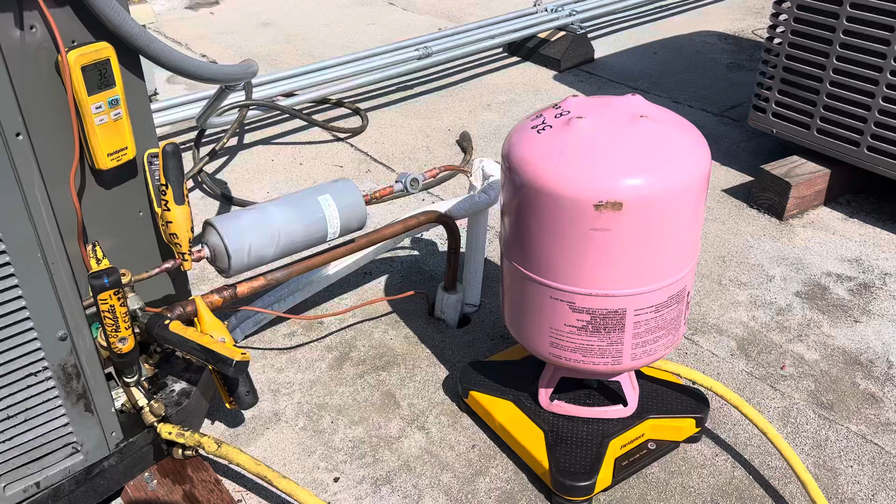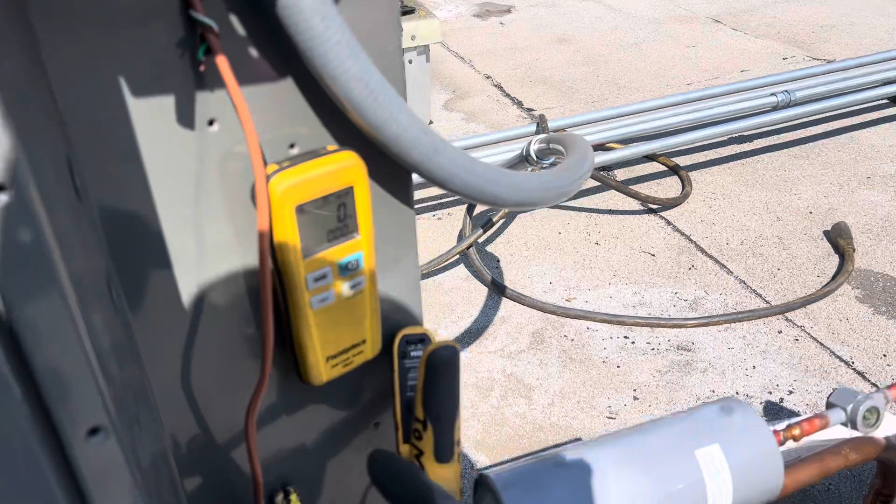All right, we're ready to change our superheat. And let's zero out this 32 12 ounces. And I already weighed the container of refrigerant without the hose attached to it. Was 32 pounds, 8 ounces. We're looking at it over here at our subcooling at 0.4. Come back, 0.4, 0.7. And we're 68 degrees outside right now.

So let's look at our chart here. Let me zoom in on it for you guys. So that's Apple. Give Apple a minute so it decides it wants to focus for us. There it goes.

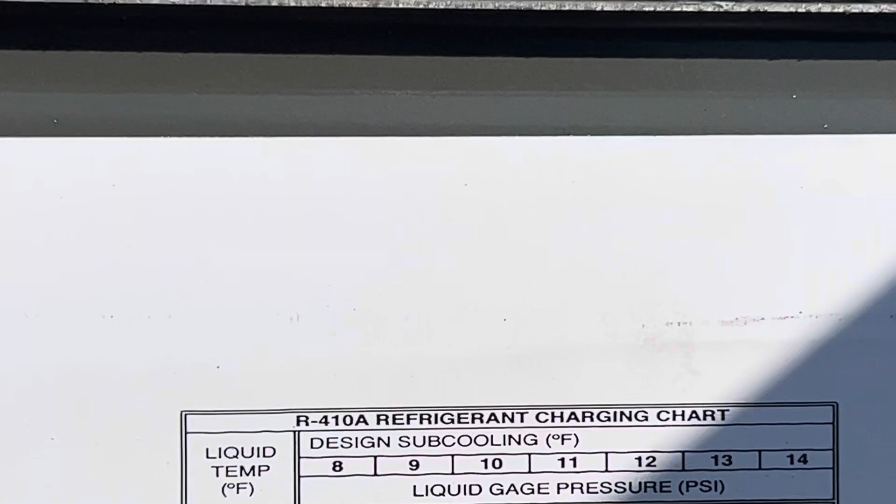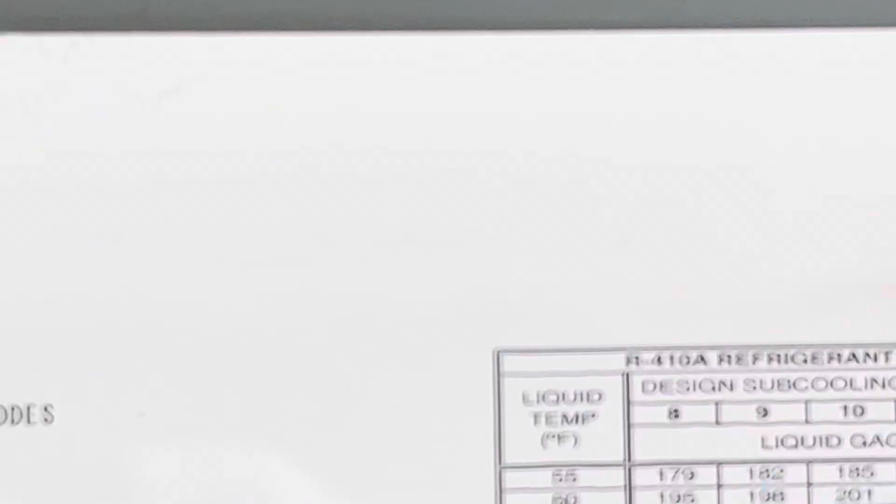So our 80 degree, and the temperature will change just a little bit, and they'll start to narrow down and come into each other a little bit, and you'll see this. The superheat, where are we going? Where's my finger at? There we go. You'll see that go up. It's been running for about 10 minutes now downstairs, 15 minutes. So I've given it more than enough time to stabilize.

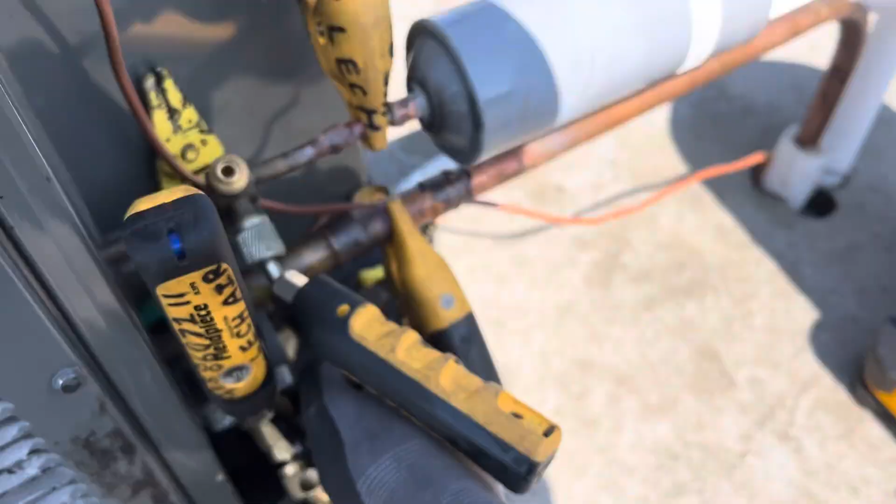So let's do a little doohickey here, and let's look at the weight. I just cracked it a little bit, just a little crack. There we go, and I'll let that go in. See how fast that was? And that was just a little crack. This is under 200 and some PSI right now. That vapor line's at 114 PSI, so we have a pressure difference. Let's come back over here and take a look at that. Hey, look at our subcooling, 1.1.

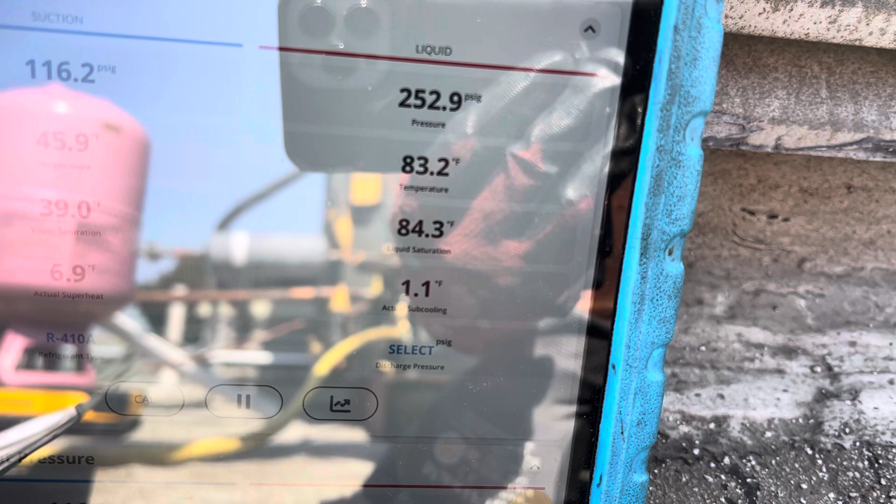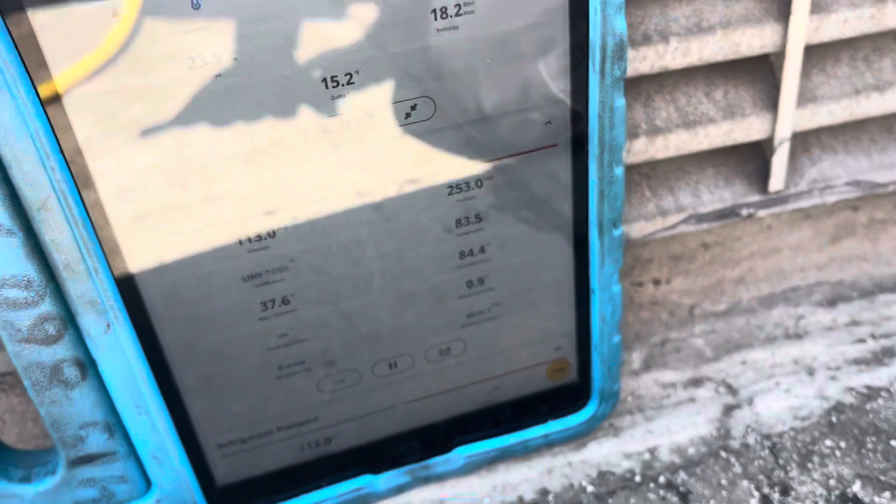And let's see if I can get that glare out of there. Can I get that? Oh yeah, I can. There we go. Is that my unit? No. That unit just shut down.

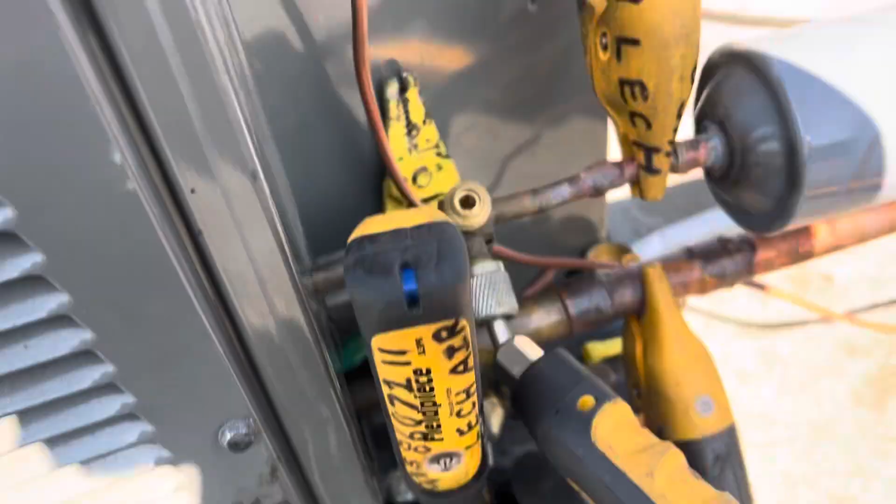So it takes a while. You need a few minutes between additions, but we need a lot to add. So I'm not gonna wait a long time between additions because we're nowhere even near close. So let's look up here. We're at 10.5 ounces. Let me crack it. See what I'm doing? I'm just barely moving it until I see some weight move on the scale.

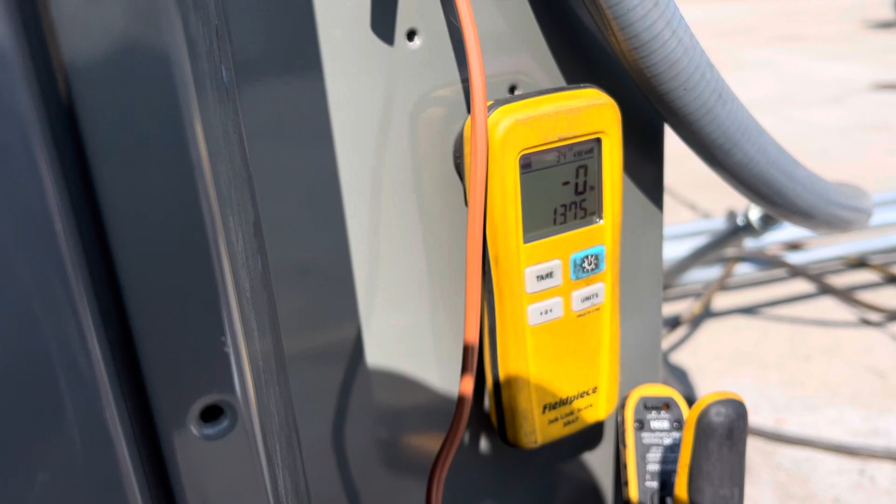I think I hear something. Do I hear something? No. There we go. I heard something. There we go. See it moving just a little bit? I want to slow it down. It's going in by the quarter ounces. Okay, I shut it off. So we now have 1 pound, 4 ounces in the system.

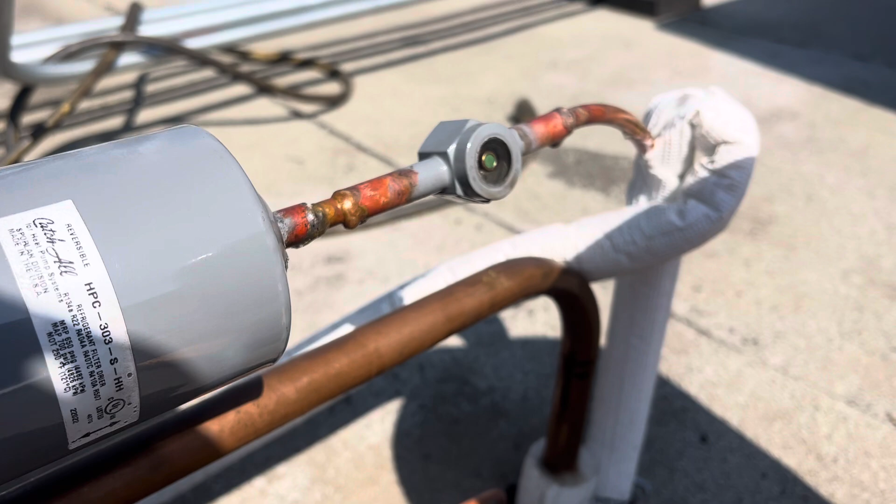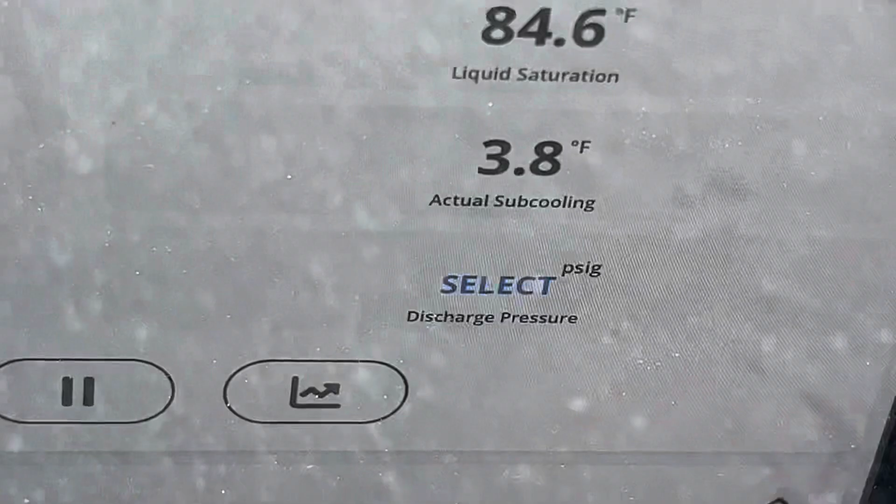Hey, look at that sight glass. Now don't go by sight glasses. Remember what I told you about going by sight glasses? That's getting to be a pretty damn clear sight glass. Oh wow, we got a clear sight glass. We must be good to go. Isn't that what the jerk off, top off can guys do in automotive? It's clear sight glass, good to go. Well, let's see what we have here. 3.8 subcooling. We're not full yet.

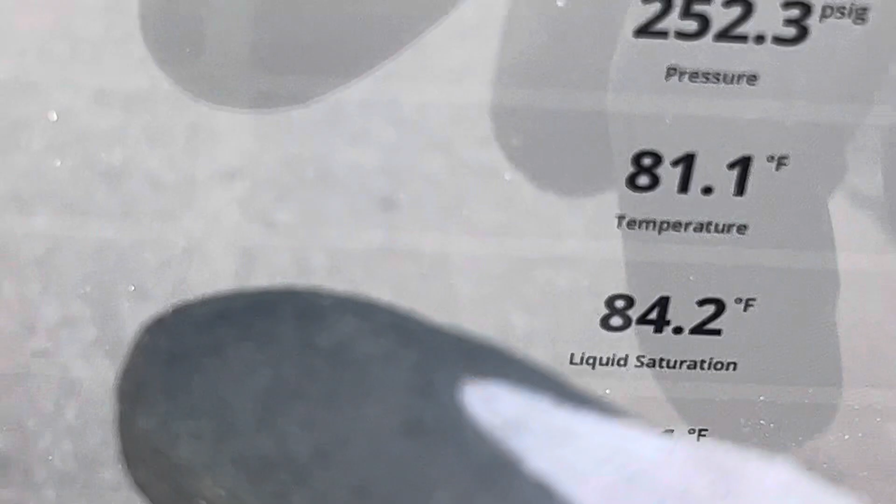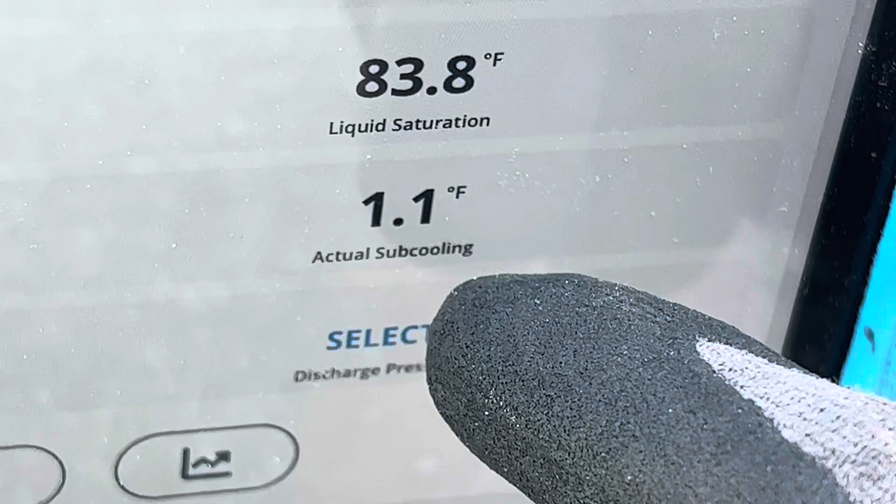What do we need? Our line temperature. Let's look back at our line temperature. Our line temperature is 81 degrees. So there's 80. We should be somewhere close to 267 PSI, and our Apple does not want to focus right now. 267 with the 8 degree subcool. We're at 250 PSI, and look, we're going back down to 1. See, the refrigerant that I just added is stabilizing out. It's distributing throughout the system.

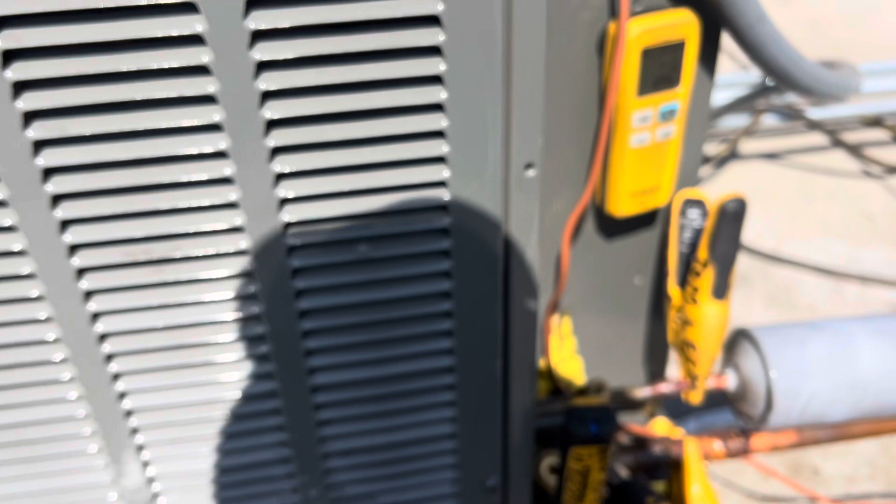I'm putting in a little bit more. You can see it going up there really slowly. It's like going in at a quarter ounce at a time, half ounce at a time. It's not gulping it. And we have a crystal clear sight glass. Okay, I'm gonna stop her right now. I know that's not even close to enough. But I'm gonna do that a little at a time and show you guys the little increments of movement and then see it stable out after a few minutes.

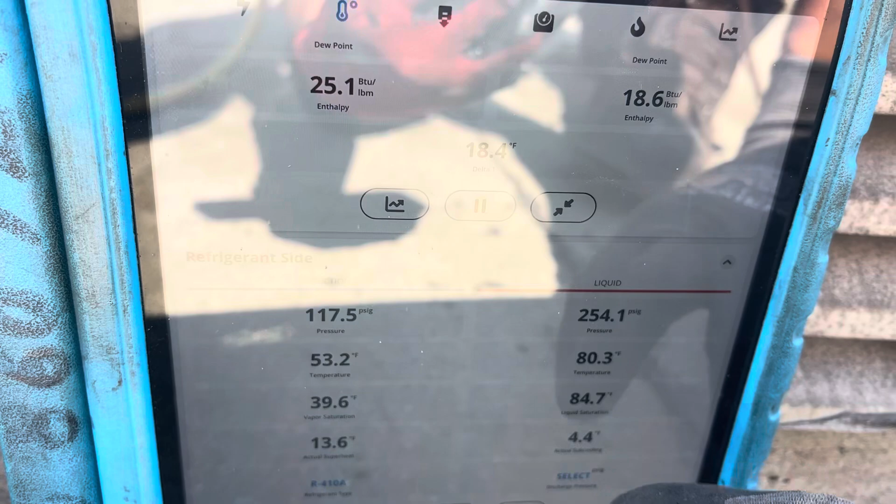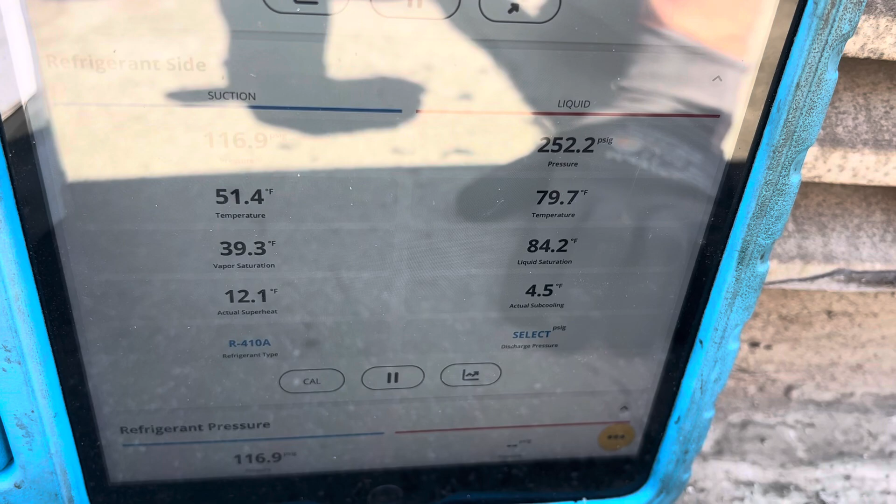Right now it says 4.5 subcooling. Give that a minute. Let it move around the system.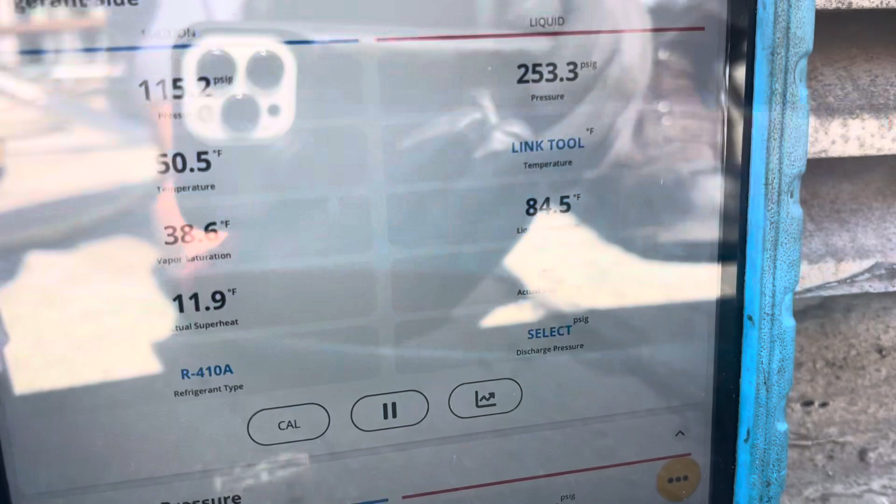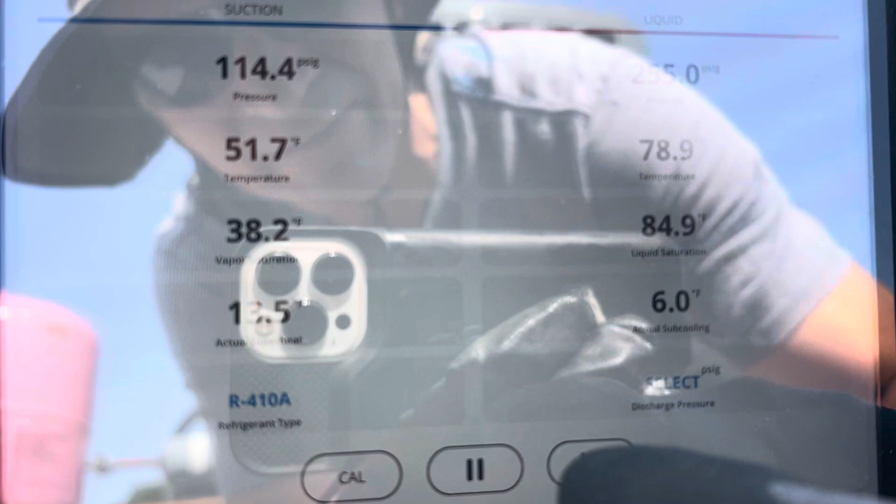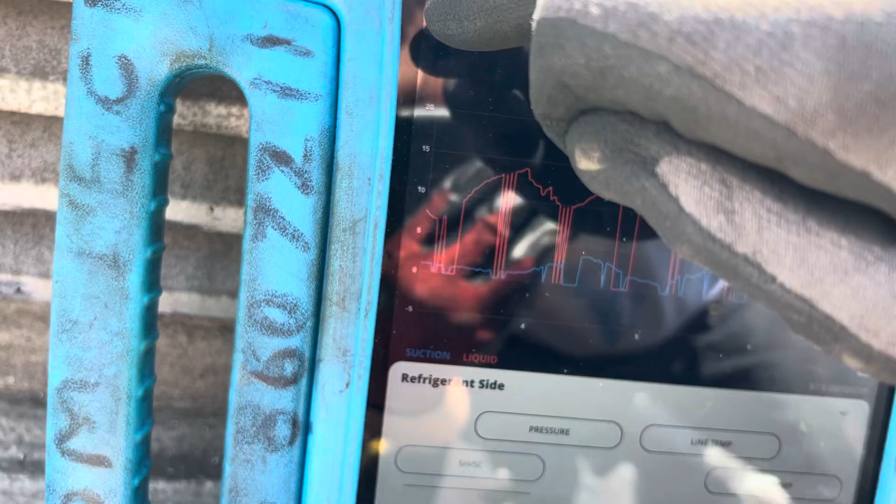And I have the subcooling graphing too at the same time, so we can take a look at the graph. I have that. God damn it, there it goes. Okay, there it is. You can see we're having some dropout of our signal right now. God, that's really unusual. I usually never have dropout, and I really have to take this glove off. Hold on a minute, take my glove off. Let's go back. There we go.

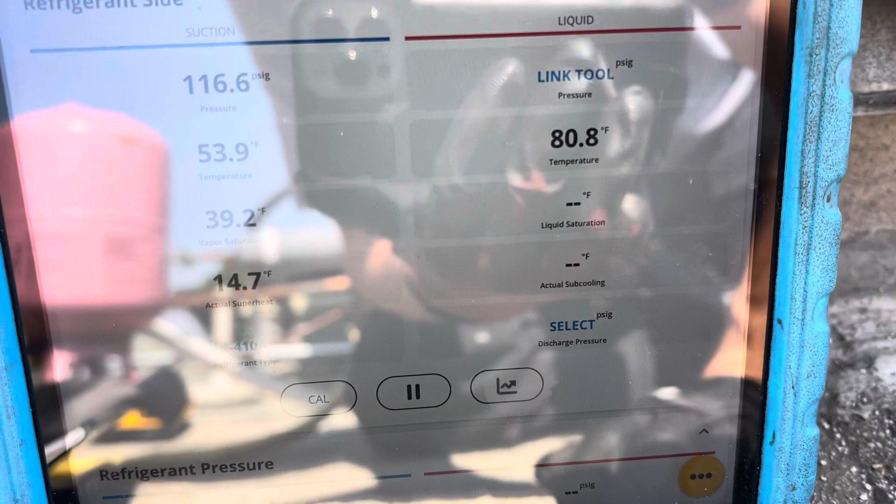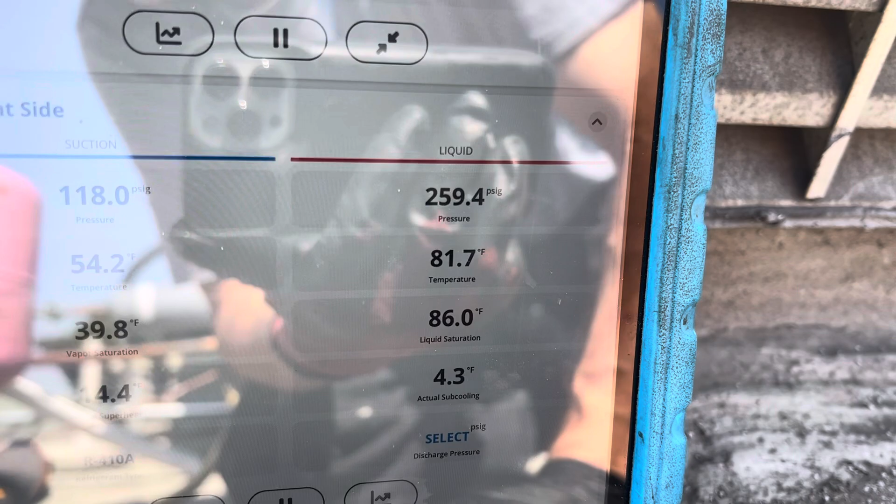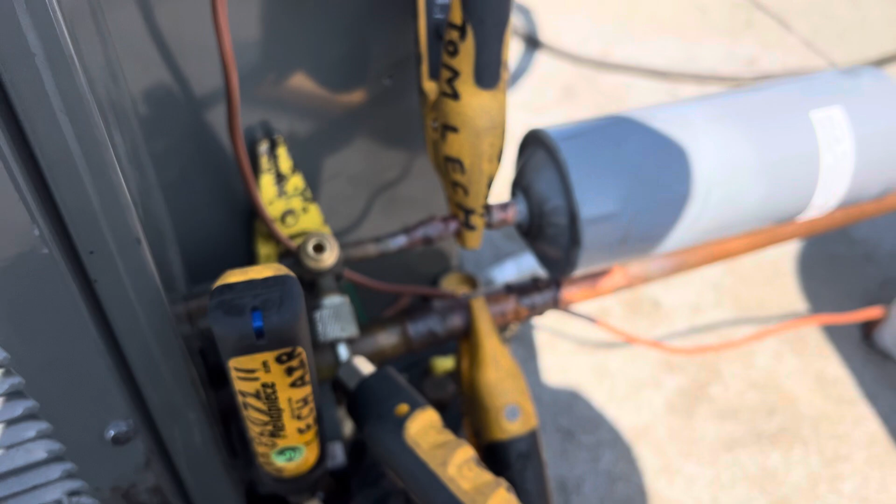So we're 4.3 subcooling, so look at it, we're at 259 PSI. At that 81, 259, we're getting closer. Now isn't this easy? Couldn't life be this easy in automotive? Let's do a little bit more. I'm gonna hit the ball valve really slowly. There we go. Nope, that's not it. Still not it. There we go, I hear something.

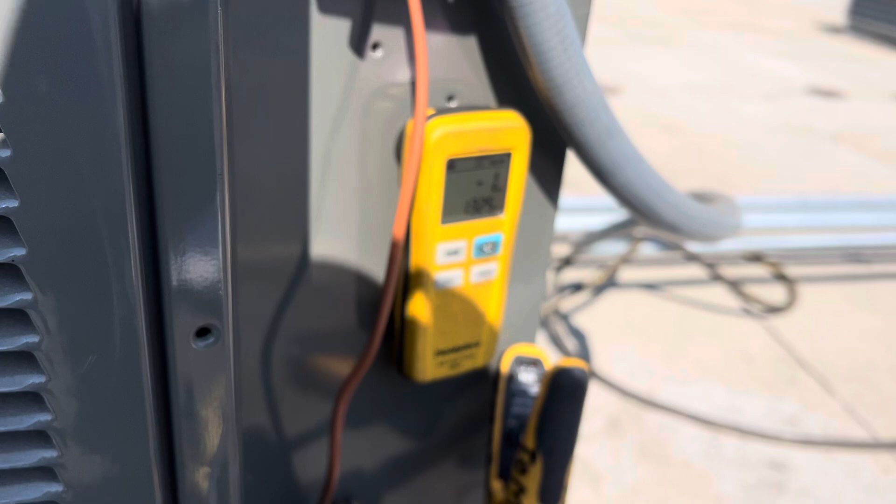Really slow. You can see it going up. I have it just cracked a little bit. I could hear it ever so slightly, and some guys just jet it in. I prefer a little more caution and put it in slower. Those other guys go, yeah, I'll slug in a half a pound or a pound, and you'll hear the compressor growling inside there. I don't do that.

Even though this is somebody else's equipment, I treat somebody else's equipment as if it was my own equipment. Even if they have used equipment, they pulled off another part of their building or one of their other buildings and it's used and I know somebody else abused it, I still try to take care of it. That's why I gave this guy an oversized filter. I left it on the vacuum pump over the weekend, running 24/7.

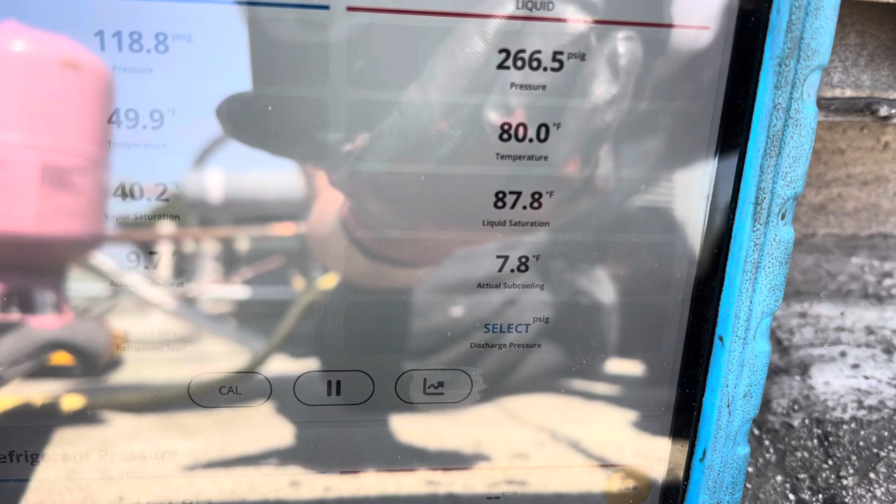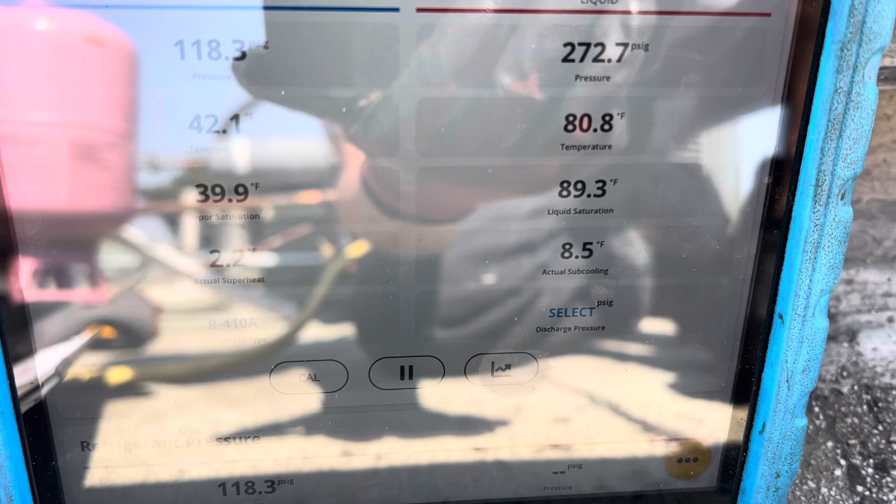.4. I think I put in while I was talking there and not paying attention. I think I might have put in too much. Let's see where we are at. 7.8, close to that 8. There's the 8, 8.2. See, I told you I put in a little bit more than I wanted to by talking on the YouTube thing. But we don't have to worry about this anyway.

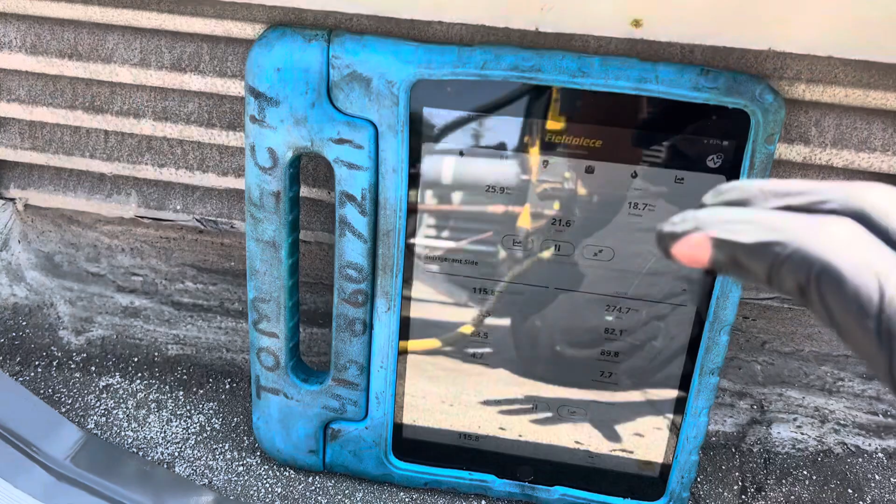There is no ducting attached to the air handler downstairs. And if you've seen the previous video, there's ducts sticking out of the intake and the exhaust of the air handler. The airflow is being blocked right now. So I cannot set a correct airflow, a correct subcooling, because the airflow is not correct on the air handler. But I could get it close, so when they get it hooked up, they'll have something working. So let's see where we're at.

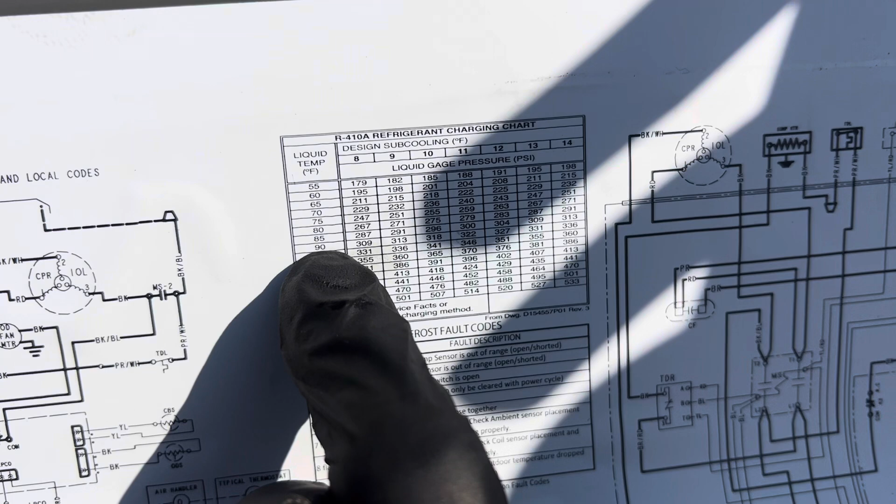269 PSI, 8.3. So our liquid line temperature is 89 degrees. 89 degrees is close to 90. And of course, here we go, and Apple doesn't want to work again. Close to 90 liquid line temperature. And we have 269. So we're between the 287 and the 309 pressure-wise. Design subcooling of 8.

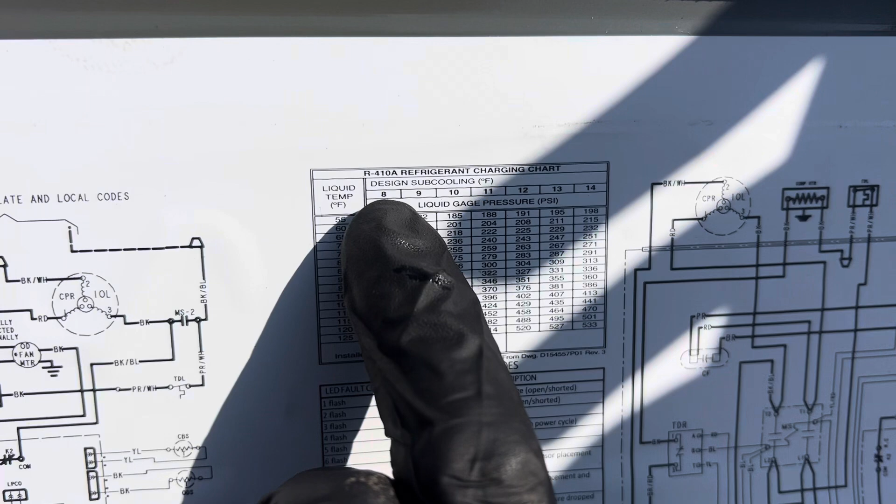We have a low pressure. Why do we have a low pressure? Well, it's only 68 degrees outside. This is a high efficiency condenser, and there is no head pressure control on this thing to slow down the fan. This is a 1-speed fan. At cool ambient outdoor temperatures, it is pulling more cool air over the coils than it was designed to. I am throwing on a low ambient kit on this thing.

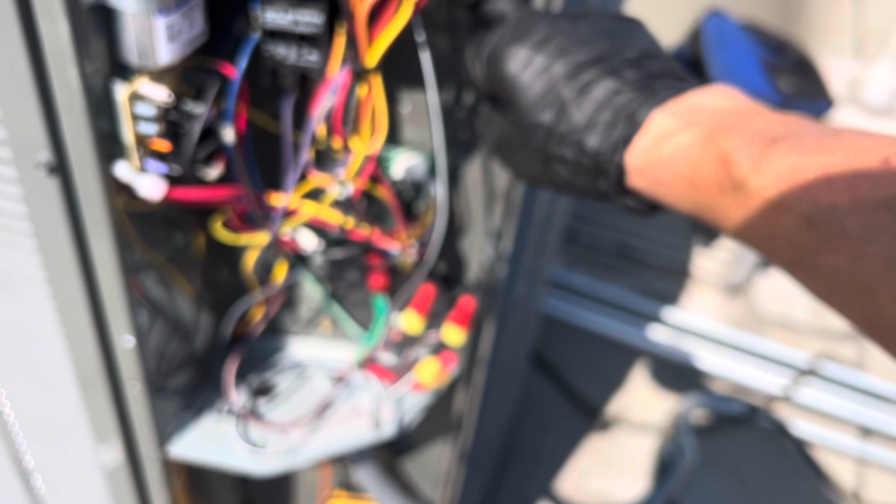At least this one does have a heater on the compressor. The low ambient kit is going to be one of these things. So it's going to get a low ambient kit, and it's going to get a 3-phase protector on the motor. And it looks like I have room. I could put the 3-phase, I think it might fit right here. And there'll be a 3-phase protection and low ambient kit added to this.

So this will be operating when it's 35 degrees outside on the coldest winter. It will nearly stop this fan. It'll come to a stop and it'll ramp up just a little bit and it'll barely rotate, and it might even stop altogether to keep the head pressure up.

So that's it for government work here. We are all done. I just hit 9 degrees of subcooling, and I wonder what our ambient is. Our ambient must be higher too. So that's it, guys, and you can see our superheat's close to 10, 11.

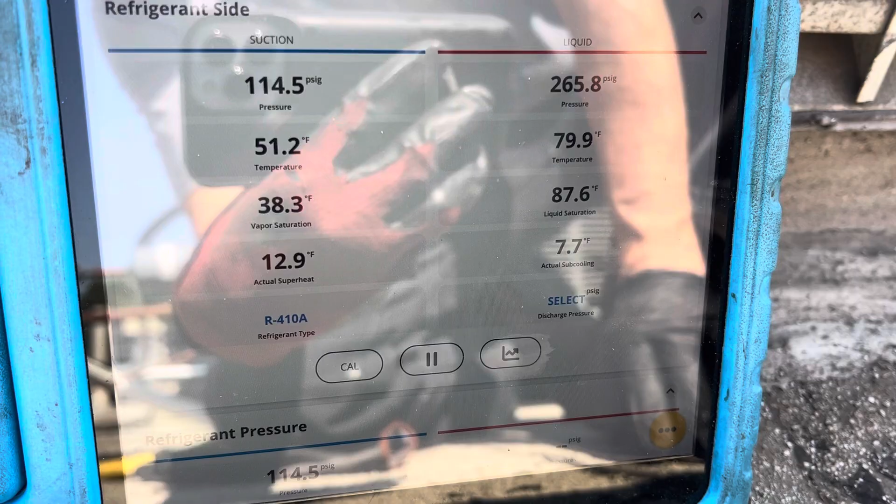I just wanted to get it close enough, and you see how early the bubbles stopped on the sight glass. Sight glass means nothing. Stop using sight glasses.